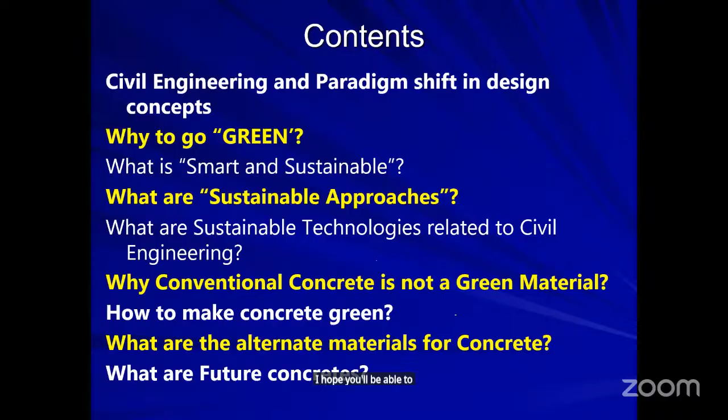Now coming to civil engineering. If you look at civil engineering, it is a branch which has always faced the challenges of the future. This is the oldest engineering branch, one which helped in advancing civilizations and building our quality of life, starting from the construction of pyramids to high-rise structures, or at present, using smart and sustainable technologies.

Throughout this journey, civil engineering has played a major role in building infrastructure. Infrastructure means good buildings to live in, like apartments, high-rise structures, auditoriums, and all kinds of structures. It also means good connectivity through modern transportation systems, whether public transportation like roads and bridges, or water transportation, sanitary and gas transportation systems.

Then there is good connectivity to modern communication systems, be it electric or satellite communication, building of transmission towers, etc., where the knowledge of civil engineering is used. Then in achieving self-reliancy, good irrigation systems, dams, barrages, canals, flood control systems, and storage facilities all involve civil engineering.

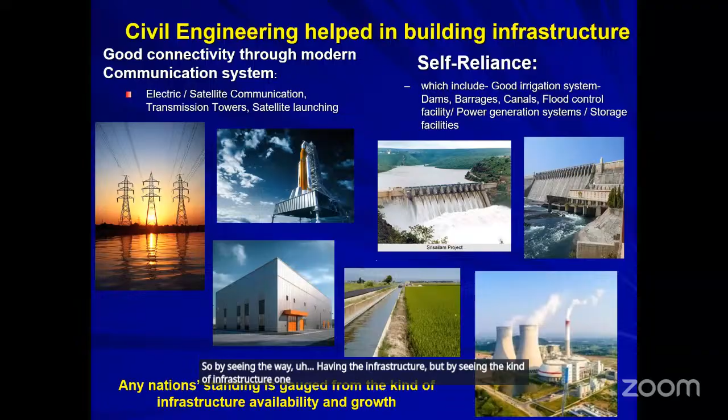Today we are at such a stage that any nation's standing is gauged from the kind of infrastructure availability and growth. By seeing the kind of infrastructure, one can gauge how developed a country is. Civil engineering has also seen great failures, which have led to development of new knowledge and a new kind of engineering called forensic engineering. These failures always remind us of the significance of proper design, execution, and maintenance.

Now coming to the concepts that have changed over time in civil engineering, which made us look for new materials with new properties. I have listed a few of the paradigm shifts, there can be many. The first: we have moved from a stress-based approach to a strain-based approach. The second concept is we have moved from resistance of large forces to evasion of forces.

The third concept is we are moving from a solid mechanics based approach to a fracture mechanics based approach, though we have not yet completely moved. Then from a strength-based approach towards a performance-based approach, and from a prescriptive-based approach to a performance-based approach. These are the paradigm shifts in civil engineering which forced us to look for new materials and technologies.

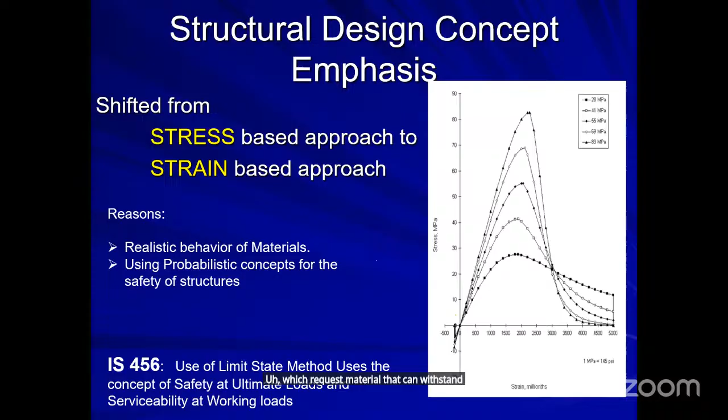Now coming to another paradigm shift: solid mechanics based to fracture based. Solid mechanics, in simple terms, I can say is strength of materials based design. Of course, those are the basic principles, and we still continue to use them.

But normally in strength of materials, what we assume, what we have studied in solid mechanics, is that the material is homogeneous, isotropic, etc. That means homogeneous means no cracks at all inside, no inherent cracks in the material. So based on that, we have not taken the presence of crack into consideration in the design.

But later on, many failures took place. Even though the structures were designed with a great factor of safety, great failures occurred. The reason is the presence of inherent cracks. Any material in this world cannot be said to be completely homogeneous and flawless. Definitely, any material you take will have some kind of inherent flaws, inherent cracks.

Fracture mechanics design bases its design on the concept of the presence of a crack. Whenever there is a crack, there is going to be stress concentration near the crack tip. Not only the stress concentration, but whenever the strains or stresses approach a certain state, the cracks will increase uncontrollably.

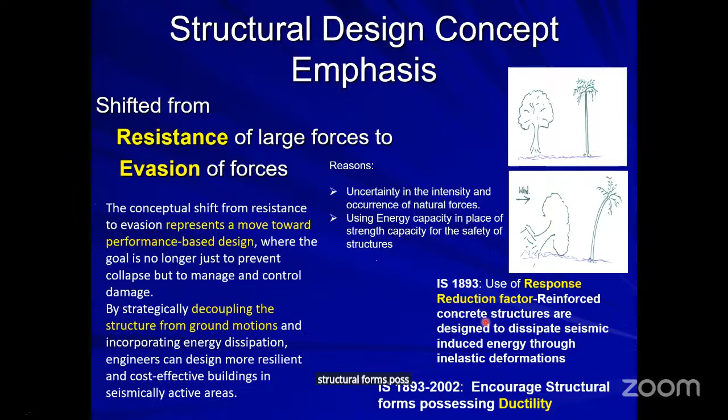Now, another conceptual shift, which all of you know: strength approach to performance approach. What do you mean by strength approach? That means people give more importance to the strength of things only — strength of the material, strength of the structure, etc. But nowadays people are more conscious about performance.

For example, if you look at warehouses, the abrasion resistance of the floor becomes very, very important. So we should design that particular floor to have a certain level of abrasion resistance, not just a certain level of strength.

We have to design the floor for a certain level of resistance, abrasion resistance. For example, in a chemical factory, the floor has to be designed to resist the attack of chemicals, where there is a possibility of spillage. That's why each industry has its own requirement.

Strength is, by default, taken for granted, but the performance people are worried about this. That is why when the strength approach was there, earlier we were using simple normal concrete, which is basically strength based. We used 4 ingredients like cement, sand, coarse aggregate, water, etc.

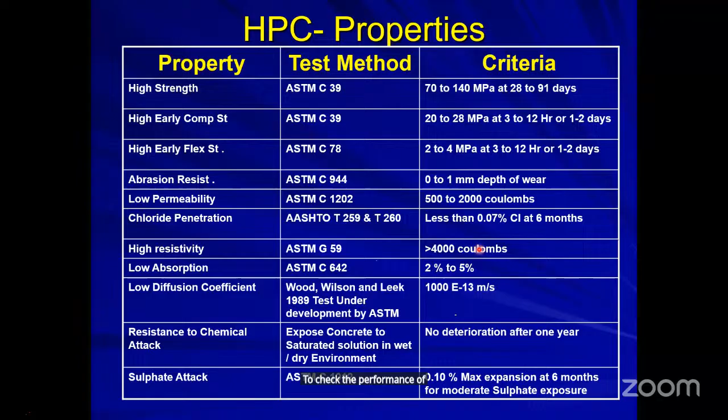So instead of giving a prescription to a contractor, you fix the performance specification. For example, in ASTM, a lot of performance specifications are there. You can specify my floor should have an abrasion resistance of this much, or low permeability of this much. That means, how to test that particular performance character? Based on that, ASTM has given a lot of standards to check the performance of various things.

So what I mean to say is there is an increasing concept of this performance. Then to satisfy this performance, we have to go for new materials or alternate materials, and at the same time they should bring the green concepts and also the sustainability to the picture. These are the paradigm shifts that we have discussed so far.

Now coming to why to go green. Since the Industrial Revolution, the world has witnessed a lot of changes, innumerable technological changes and achievements. There is tremendous population growth, and because of this, there is a tremendous increase in the use of natural resources.

Since 1950, there is almost an 8 to 10 times increase in the use of natural resources. For example, we are using fresh water withdrawals of the order of 16% towards the building activity. Timber, whatever is produced, 25% is being used for building activity. Similarly, raw material consumption is 30%. And ozone depletion due to chlorofluorocarbons in use reaches almost 50%.

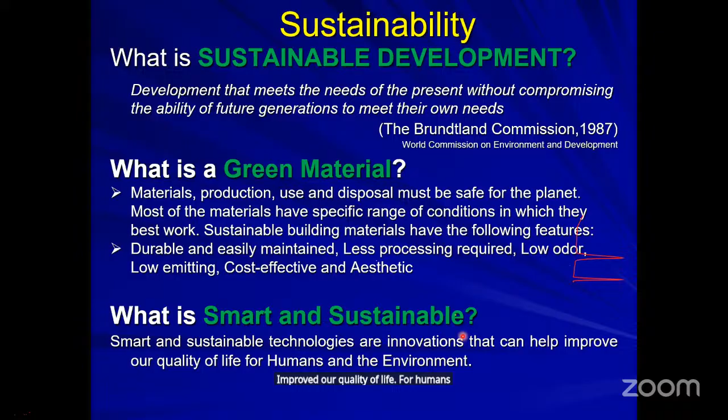Let us see, for example, continuing with smart and sustainability. Nowadays we are recalling smart cities, etc. So what is a smart city? A smart city is one which uses information and communication technologies to improve a city's infrastructure and quality of life. Smart cities can include efficient urban planning, sustainable public transportation, and smart waste management.

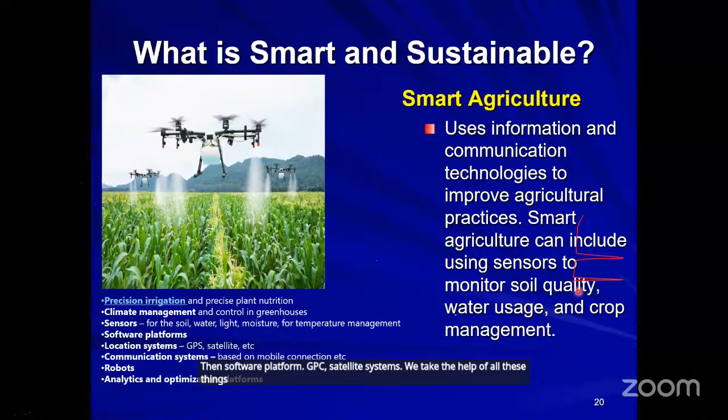For example, smart agriculture uses information and communication technologies to improve agricultural practice. For climate management, we use sensors for soil, water, software platforms, GPS, satellite systems. We take the help of all these things in agricultural practices, so then we can call it smart agriculture.

Then Internet of Things. In this we use smart sensors and devices to monitor the systems in real time. For example, water utilities can use IoT to identify leaks wherever they are and optimize water distribution, etc. So IoT is coming in a big way, making civil engineering a smart and sustainable engineering.

Then of course the buzzword AI and ML. These techniques will definitely be useful wherein large data is there, wherein we can analyze the large data and make useful conclusions, and later on we can use this.

Now coming to the different sustainability approaches. Here I've listed a few of the approaches: one is cradle to gate approach, then cradle to site approach, cradle to construction, cradle to grave, and the last one is cradle to cradle approach. For example, what do you mean by cradle to gate?

Cradle to gate involves, for example, cement production. Cement production starts from the extraction of the ore, extraction of the required raw materials, etc. Then it will be transported to the factory, and there will be manufacturing of that particular cement or material, so that means it is ready to be transported, ready to be distributed. So till that stage, we call the concept cradle to gate approach, where we take all precautions such that wastage is minimal in all these things.

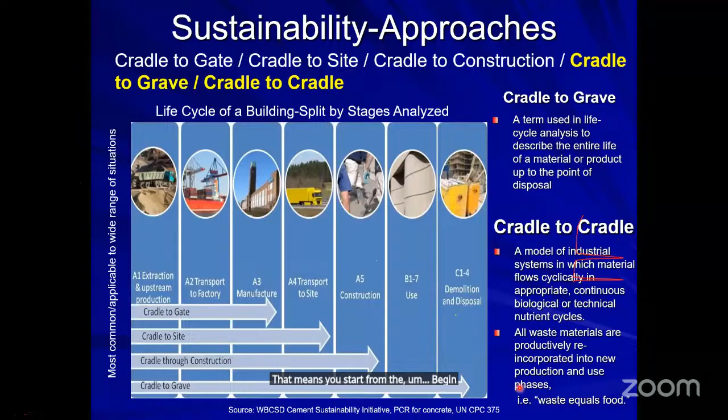That means it starts from the beginning and comes back to the beginning of the cycle. That's why this cradle to cradle approach is now a buzzword. People are trying to implement it in different technologies, different material and structural cycles and performance cycles. Once it completes the material cycle, it goes to the performance cycle. Once it completes the performance cycle, then it has to come back again to the material cycle.

Now coming to the smart technologies related to civil engineering. What are the smart technologies here? Building information modeling, augmented reality, Internet of Things, digital twins. Digital twins is a very useful one, wherein we create a virtual model of the actual systems, and we can experiment on that, how it is going to respond. If it is responding as expected, it is okay. If it is not responding as expected, then we can change our model and take care of the things. So these are all the things which are being helpful.

Then the few ways to achieve smart and sustainable infrastructure: the use of renewable energy to reduce the carbon footprint, use of recycled materials to reduce waste, adaptive design that allows systems and structures to change and adapt to changing conditions, sustainable drainage systems, smart power and water smart grid, smart buildings, green building materials.

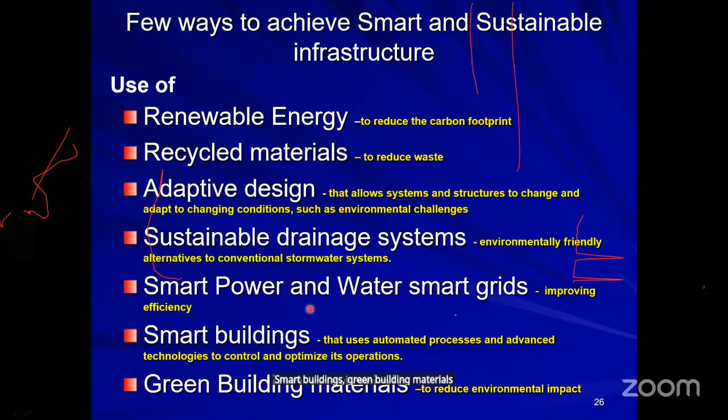Now coming to the building envelope. Building envelope means the kind of material that we use in a building and shape of the building, whatever it may be, how best it is going to conserve the energy. So building envelope also plays a lot of significance in bringing sustainability into the picture.

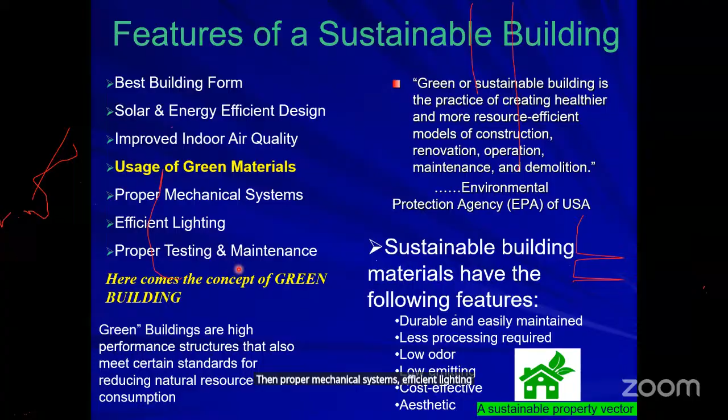Now coming to the features of a sustainable building. Features of sustainable building include many aspects. I've listed a few things: best building form, uses non-conventional energy sources like solar energy for efficient design, improved indoor air quality, usage of green materials, proper mechanical systems, efficient lighting, proper testing, maintenance, etc. These are all the characteristics of a green material.

Then why is conventional concrete not green? You all know that conventional concrete is extensively used. It's the most consumed material in the world after food and water. Apart from the positive aspects, it's extremely versatile, good strength, whatever the required strength we can get from the use of this concrete. Then it can be cast to nearly any desired shape. That is, moldability is the greatest advantage of conventional concrete.

Apart from these positive aspects, there are certain negative aspects. It's the most energy intensive of all manufacturing industries; production of cement involves a large amount of energy. Then limited ultimate strength, limited durability. Another factor is it uses virgin material - sand, coarse aggregate, whatever it may be, natural materials. Using such natural materials means depletion is taking place very aggressively or fast. Then the production of cement itself produces a lot of global warming gases.

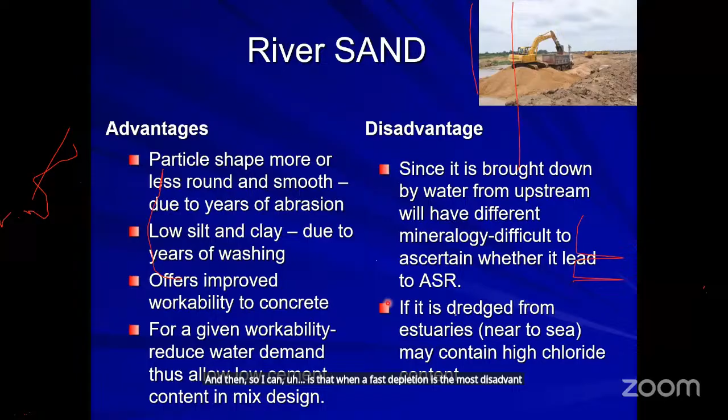But the disadvantage is it is fast depleting. Rather, fast depletion is the most important disadvantage of this particular material. Then what are the alternatives to river sand?

When you are looking for alternatives to river sand, you should keep two issues in mind. What are the two issues that will come up? One is the fine content, another is the harmful substance.

Fine content means there is a possibility that alternate materials may have more fines. More fines means more surface area. More surface area means more water demand. More water demand means reduction in the strength actually. So you have to be very careful about fine content when using an alternative to river sand.

Then another thing is harmful substances. Is there any harmful substance which will affect the durability of the system? These are the two aspects you should look for when using an alternative to river sand.

Then what are the alternatives? There are many alternatives that have been researched, and a lot of information is there in the literature. For example, here I have listed a few: manufactured sand, copper slag, crushed waste glass, fly ash, dune or desert sand, iron slag, foundry sand, recycled sand from demolished construction waste, and surki, that's brick powder, etc. These are certain things attempted as an alternative to river sand.

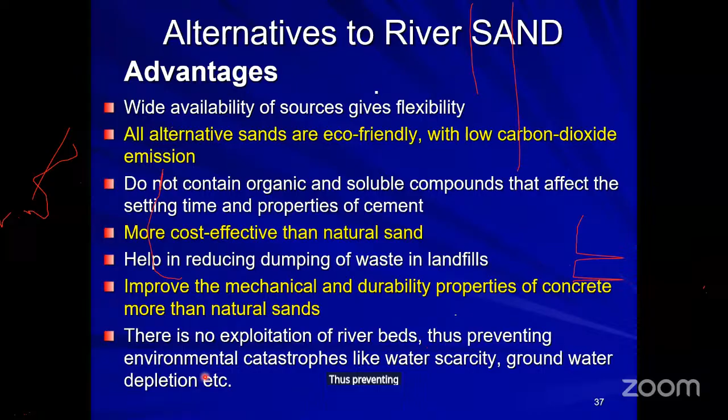Suppose you are using fly ash, it definitely reduces the dumping of waste in landfills. It also improves the mechanical and durability properties of the concrete. Rather than all these things, another important point is there is no exploitation of the riverbeds, thus preventing environmental catastrophes, etc.

As I told you, certain issues we have to take care of: workability issues, because of the larger proportion of fines; low moisture content; and possible adulteration in the manufactured sand or manufactured materials. These are things we have to keep in mind.

For example, if you go for crushed stone dust as a replacement for sand, it's okay from the strength point of view, but because of its sticky nature, it is difficult to work with as a replacement for sand. That is why whenever you are using it for plastering applications, normally a lot of wastage will occur, unless it is properly designed.

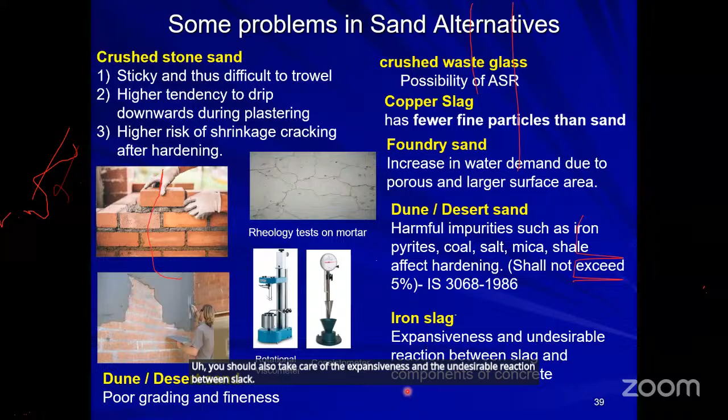If you are using dune or desert sand, there is a possibility of harmful impurities such as iron pyrites, etc. Of course, if you can limit them as per the code of practice, there is no problem. Then iron slag, if you are using that as an alternative to river sand, you should also take care of the expansiveness and undesirable reaction between slag and the components of the concrete. These are all certain aspects you have to take care of when going for alternatives.

Nowadays, sand is being manufactured using the technique of geopolymer. Such a thing is called geopolymer fly ash sand. They are manufacturing it with the proper mix proportion, etc. The material can be manufactured in different sizes, which can be used as a coarse aggregate or as sand. We'll see these geopolymer aspects.

Another aspect is alternatives to aggregates: lightweight aggregates like pumice, scoria, fly ash, expanded clay, chipped shale, expanded slate, expanded slag. These are all things which can be used in place of and as alternatives to aggregates. But at the same time, you should look for the strength aspect. When going for lightweight aggregates, definitely strength is problematic here, so you should be careful in mix design and strength aspect.

Now coming to people using agro waste as aggregates, whether fine aggregate or whatever it may be, in concrete, because we have a lot of solid waste generated from agricultural practices. So how best can we use that in concrete? For example, sugarcane bagasse ash, rice husk ash, jute fiber - these are all available. How best can we put this agricultural waste into proper utilization? From this perspective, I have listed certain aggregates - agro waste.

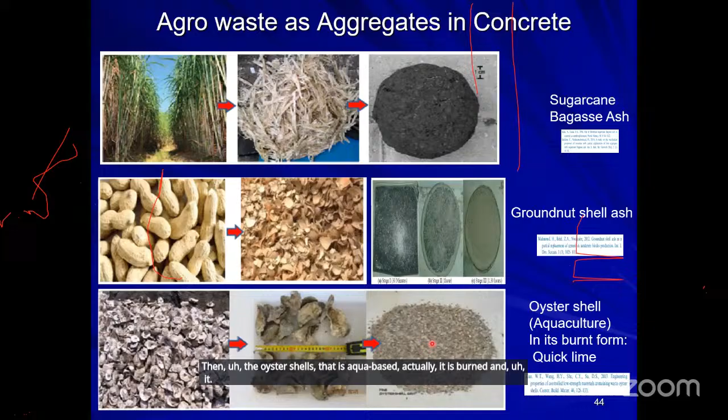For example, if you look at sugarcane after its utilization, we can burn it and sugarcane bagasse ash comes into picture, which can be used as a useful material in concrete. Similarly, groundnut shell - groundnut shell ash can be produced. Then oyster shells, which are aqua based - it is burnt and gives quick lime, which can be used as an alternative to fine aggregate in concrete.

Similarly, cork shell - it's a natural cellulose material, but that can also be used in its fine state as a fine aggregate in concrete. Similarly, giant reed fibers - after burning, the resultant ash can be used as a fine aggregate. Similarly, rice husk ash is being used. Similarly sawdust, then tobacco waste, then crushed coconut shell - coconut shell is also used after breaking it to the required sizes, as an aggregate in concrete generation.

If you look at the physical properties of all these things - sand, sugarcane bagasse, groundnut shell, etc. - almost all have similar specific gravities. We can size them to have a similar fineness modulus. Of course, bulk density wise there is a little variation, but some of this agro waste is comparable with natural sand. Coming to water absorption, this is an issue - sometimes water absorption will be more in case of agro waste, so that has to be taken care of.

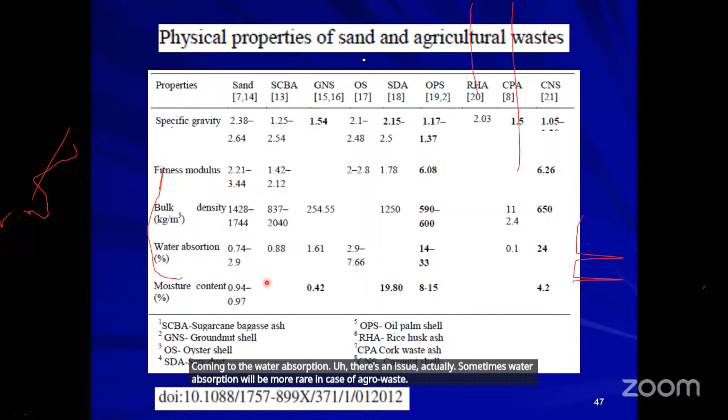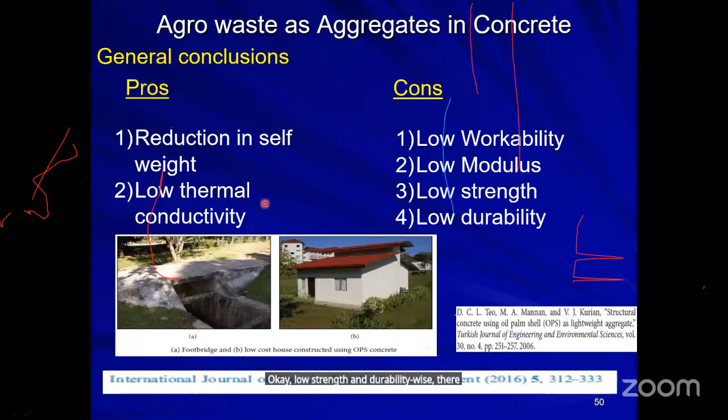Now coming to agro waste pros and cons. Pros: reduction in self weight, low thermal conductivity is one of the advantageous parameters. But when it comes to disadvantages, it may result in low workability, low modulus - meaning there is a possibility of slightly higher deformations - and low strength, with contradicting aspects regarding durability. Of course, all these things I've taken from the literature; you can also go through the literature on how these agro wastes have been used and concluded. For example, slump value of agro waste concrete containing bagasse ash, groundnut shell, oyster shell, giant reed ash, etc., decreased.

The slump value of agro waste concrete decreased as the percentage replacement increased, so this is an aspect you have to keep in mind. Similarly, in case of agro-based concrete containing bagasse ash etc., the minimum strength of concrete was achieved with the addition of around 20% replacement. Such conclusions are available in the literature wherein you can use them.

Now coming to certain special concretes, what do you mean by special concrete? Special concrete is defined as a concrete which meets certain performance and uniformity requirements that cannot always be achieved routinely by using only conventional materials. That's what special concrete is.

Here, special concrete means the requirement. Coming to the requirements, it's requirement based only, so requirements can be anything. Sometimes requirement can be long-term mechanical properties, sometimes volume stability, sometimes compaction without segregation - that means self-compacting concrete like that. So there are different requirements, and each requirement demands a different type of concrete.

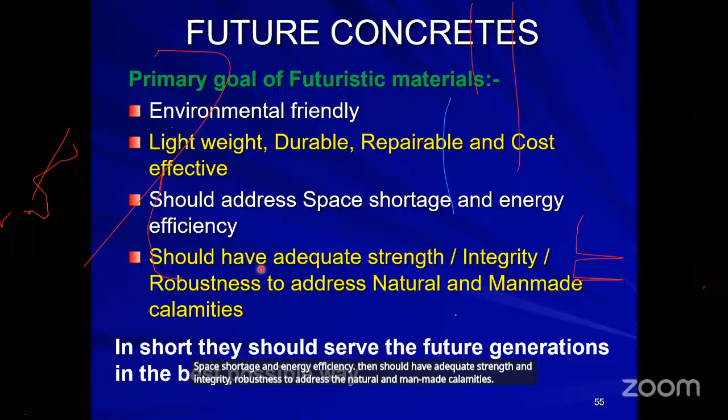Futuristic materials should not only be environmental friendly, lightweight, durable, and repairable, they should also address the space shortage and energy efficiency. They should have adequate strength, integrity, and robustness to address natural and man-made calamities. So these are all the certain requirements of future materials, and what are the possible futuristic materials?

The possible futuristic materials - here I have listed a few things. One is nanotechnology based materials, for high strength and high durability applications we can go for nanotechnology based materials. Then biotechnology based materials - for self-healing applications, people are going for biotechnology, bio-based concretes or bioconcretes etc.

Then super hydrophobic materials for waterproofing applications. Super hydrophobic means - normally the long-term problem with concrete is the seepage of water into the system. So if you can make it hydrophobic, then we can improve its waterproofing characteristics etc. Of course, lunar materials to make colonies on the moon to overcome the space shortage on Earth.

Similarly, another requirement is security protective materials. As I told you, in IS 456 they are introducing three more limit states - limit state of integrity, limit state of robustness, and limit state of restorability. In this concept of integrity and robustness, whenever the materials or structures are exposed to chemical or explosive attacks etc., there should be integrity of the structure - it has to be preserved.

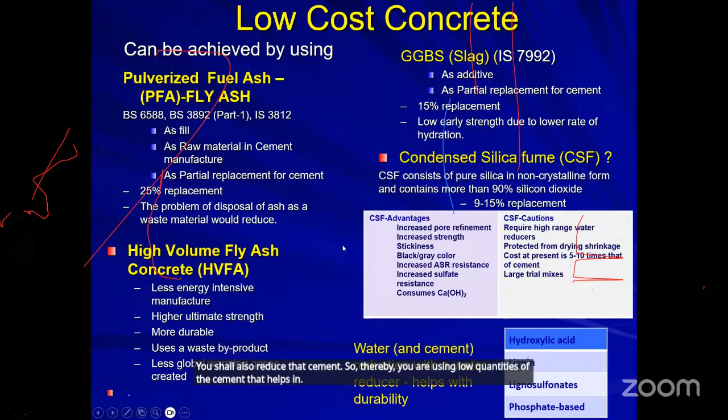Then lightweight concrete. You all know lightweight concrete has got a lot of applications. In this category, I can say there are lightweight aggregate concretes, foamed concrete, and no-fines concrete. Lightweight aggregate means we use aggregates which have certain good thermal properties, so such concrete will have good thermal properties.

There are several routes to produce lightweight concrete. One is no-fines concrete - it is structural, but it's a permeable concrete. Foamed concrete is normally used for non-structural applications only. Similarly, for normal paste with lightweight aggregates, if you produce a lightweight aggregate concrete, that can be used for both structural and non-structural applications. Here, lightweight means its density will be very less compared to normal concrete.

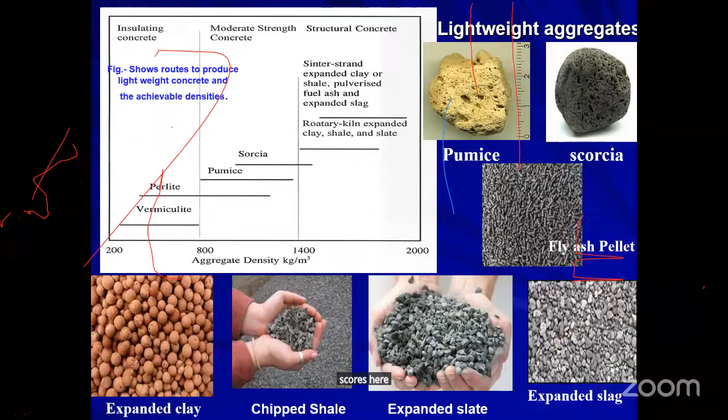Then coming to heavyweight concrete. Of course, heavyweight concrete has limited applications - limited means only special applications. For example, if concrete needs to protect and shield places with greater risk of radiation, then we go for this kind of heavyweight concrete with the use of heavyweight aggregates.

For example, barytes, which have got 3,500 kg per cubic meter, magnetite 3,900, steel shots 5,900, and lead 8,900. So when you are using heavier aggregate, definitely it will have a heavier concrete, heavyweight concrete, which can shield the radiation in a better way.

It can shield radiation, then underwater concreting applications - there are a lot of technologies for underwater concreting. One thing used is condensed silica fume. Then we can also use non-dispersal admixtures. Using these non-dispersal admixtures, concrete preserves its cohesiveness, so that's why it can be placed underwater.

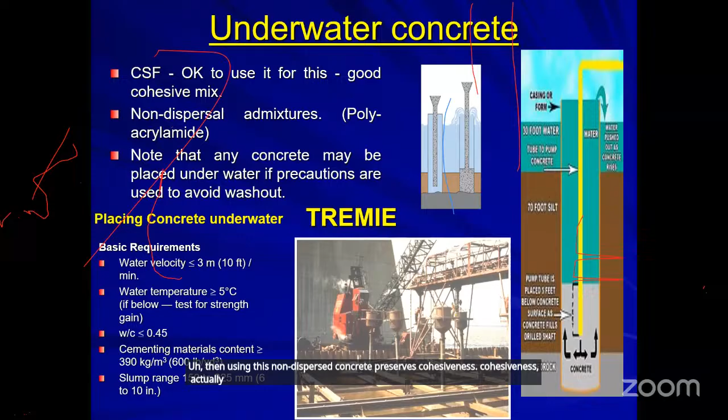Now coming to ultra high strength concrete. Normally the strength here almost approaches more than 120, 150 MPa. In that category, reactive powder concrete assumes a lot of significance. With the use of reactive powder concrete, people have produced concrete up to 200 MPa.

It also has a lot of ductility. With the use of low water-cement ratio, silica fume, fine quartz sand - these are all the ingredients for reactive powder concrete. Then steel fibers, high dosage of superplasticizer, etc. These things are used for producing reactive powder concrete.

They've got superior properties for specialized applications. Almost we can achieve compression strength of 200 MPa and flexural strength of 50 MPa, with modulus of elasticity 45 to 50 GPa, and low capillary porosity. These are all the advantages of RPC compared to normal concrete.

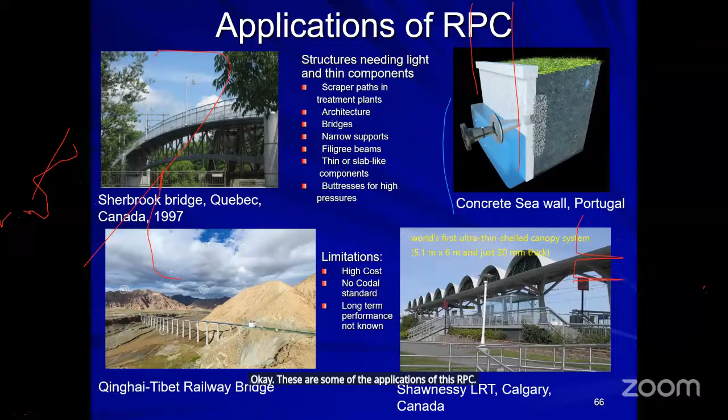Then ultra durable concretes. Here you should understand the concept of durability. Durability means the concrete system will have some durability because of certain inherent nature. Another thing is durability gets affected because of the aggressiveness of the environment - not the concrete itself, but the aggressiveness of the environment damages the system. So there are two ways durability can get affected: one by the internal system, another by the aggressiveness of external things.

So now coming to how we can produce this ultra durable concrete, there are different technologies. One is minimizing the amount of water added. Then using superplasticizers, using wide particle size distribution and packing. Then another technology is enhancing the fragmentation resistance by incorporating fibers. Then use of controlled permeability formwork. These are all the various technologies by which we can produce the ultra durable concrete.

What is this controlled permeability formwork, CPF? This is the one which enhances the concrete surface quality by draining the excess water and air while retaining the cement and fine particles.

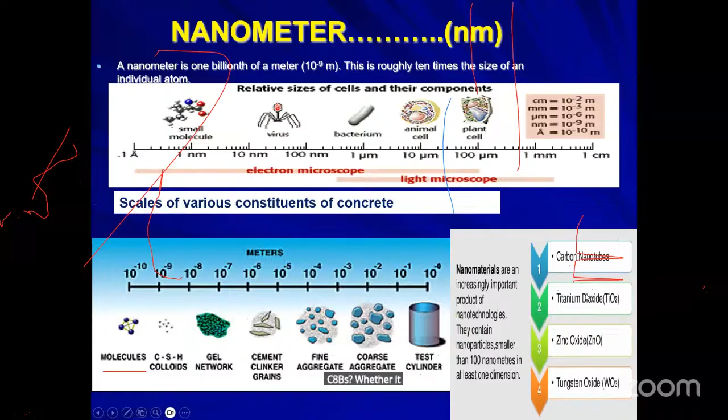So what are the various nanomaterials that we can use in concrete? One is carbon nanotubes, CNTs, whether it is titanium dioxide, zinc oxide, then tungsten oxide, etc. These are all the various nanomaterials that are being successfully used in producing high durability concretes.

Nanosilica is the one which controls the degradation of the fundamental C-S-H, calcium silicate hydrate, which is responsible for both the durability and the strength of the system. When the CSH gel is denser, we can expect more durability. So when you use nanosilica, it blocks water penetration and leads to improvements in durability compared to OPC. As a result, both the compressive strength and the life of the material are increased by 3 to 6 times higher.

Then another technology is the use of carbon nanotubes, CNTs. We can use CNTs to increase compressive strength by about 70%. We can also reduce heat conductivity by about 12 to 30%. Most importantly, CNTs bridge the micro cracks. Once the micro cracks are bridged, crack widening gets delayed, thereby increasing the durability of the system.

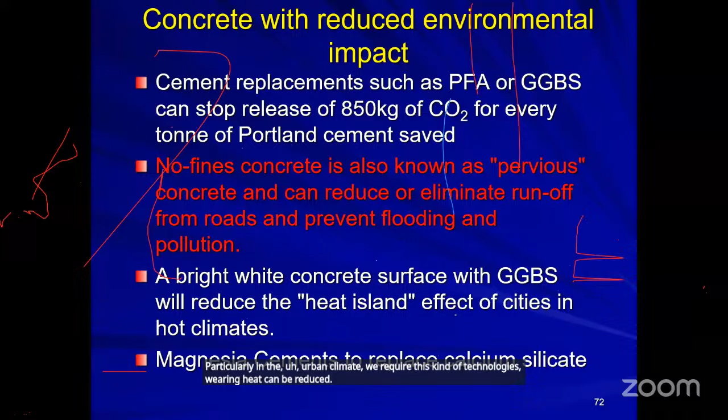Similarly, this slide shows you pervious concrete, wherein rainwater gets absorbed into the ground, thereby reducing runoff of water. At the same time, the ground is also getting recharged with this pervious concrete.

Similarly, fast setting concrete is used for precasting applications.

This can be achieved with the use of superplasticizers, or by going for high temperature curing and autoclaved concrete. Using autoclaving techniques, one can produce fast setting concretes.

Then there's placing of concrete without formwork. This technology is called shotcreting or guniting of structures, wherein we can work with the systems without formwork.

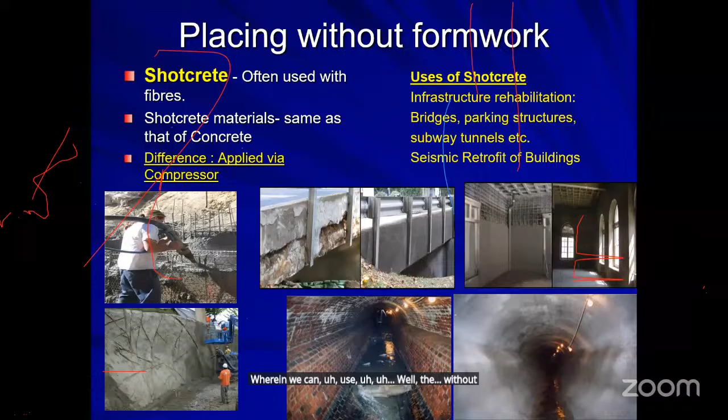Similarly, concrete suitable for bulk fill applications, that is controlled low strength concrete, is used for such applications. Bulk fill applications means, suppose you dig a trench and backfill it with normal soil—it takes a lot of time for setting. Instead, if you go for a CLSC material, we can achieve the stiffness of that system at an early time, at less time.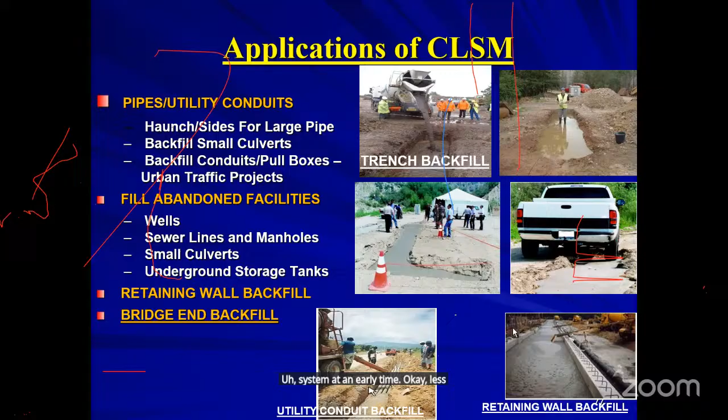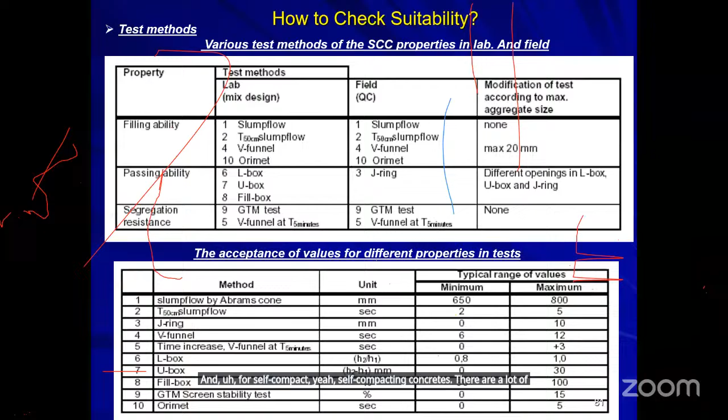For self-compacting concretes, a lot of new tests have also been developed, for example J-ring tests, V-funnel tests. Apart from the slump cone, these are all new tests that have been developed: L-box test, U-box, and J-ring test, etc. These are all the new systems that have been developed.

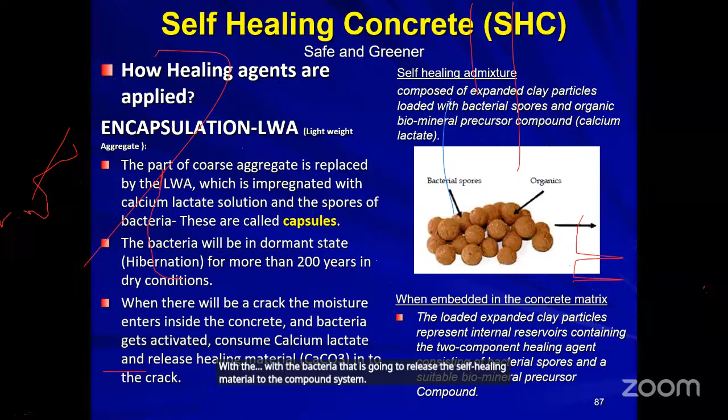Now coming to another type of concrete: self-healing concrete, which we call bioconcrete. In this, a self-healing material is introduced into the system. Whenever a crack forms, it gets closed with bacteria that release the self-healing material into the concrete system. There's a particular type of bacteria, prokaryotic bacteria, that has a large capacity to precipitate minerals.

One advantage of such bacteria is that it precipitates a lot of minerals. Second, it can survive in an environment of large alkalinity, because concrete is basically an alkaline material. So whatever bacteria we use should survive in such an environment, otherwise it will not survive.

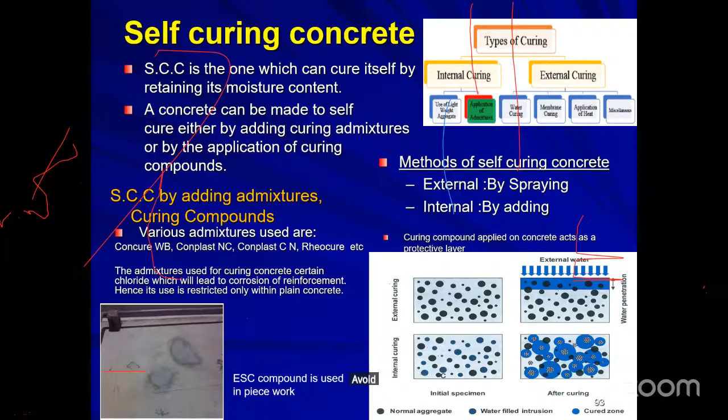Now another thing is self-curing concrete. Self-curing concrete with polyethylene glycol normally helps internally in avoiding water evaporation. Thereby, whatever water is added is useful for the curing of the self-curing concrete.

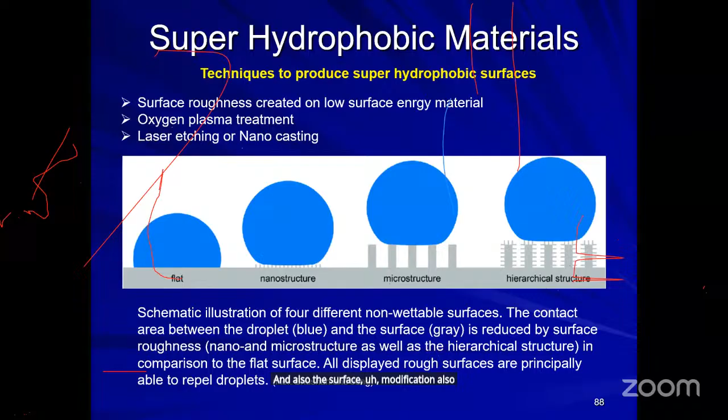Like this, there's super hydrophobic concrete. For this, the materials being suggested as coatings include manganese, polystyrene, nanocomposites, precipitated calcium carbonate, CNT structured coatings, and nanosilica coating. These are certain coatings which impart super hydrophobicity on the surfaces of the concrete. Also, surface modification can increase the hydrophobicity of the concrete.

Sulfur concrete consists of sulfur, fine and coarse aggregate, and contains neither cement nor water. It attains high strength at a very early age, 35 MPa in 8 hours. But the disadvantage is it has a low melting point.

Then there's vulnerability to combustion, poor resistance to freezing and thawing, corrosive effect on steel, and it is very brittle. These are all the disadvantages which people are trying to overcome, to find the best way to address such disadvantages.

So the list of special concretes goes on actually. I'll close it in another one or two minutes. Okay, so these are all the various types of special concretes for specialized applications. Then in future, one may have to use nano-engineered cements.

Then people are working on the DNA of concrete. You can Google it to find what is meant by DNA of concrete. MIT has come out with certain findings wherein one can structure the DNA of concrete so that we can assess the future problems that are going to come in concretes.

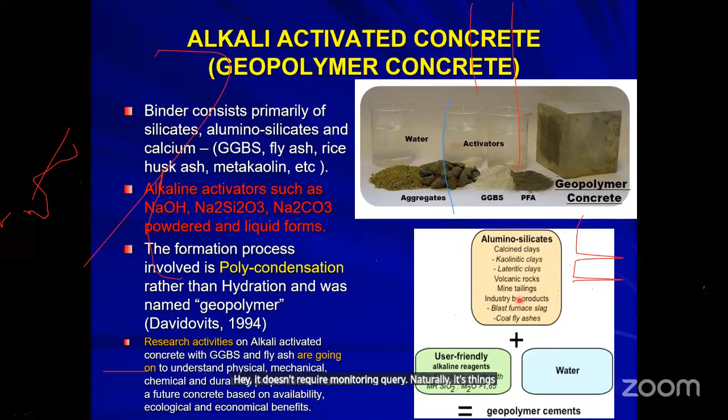Then geopolymer concrete. In geopolymer concrete, people use fly ash and GGBS with alkaline activators. By mixing these things, through the process of polymerization, one can produce the concrete. Such concrete is called geopolymer concrete. It doesn't require any curing or water naturally. That is why it is one of the promising materials for future concrete application.

Then another is carbon concrete. The idea for carbon concrete is from natural seashells. You know the formation of natural seashells - seawater contains a lot of calcium. Now, coming to why not we can use such a process in developing carbon concrete, that is the idea with which this carbon concrete has come into picture.

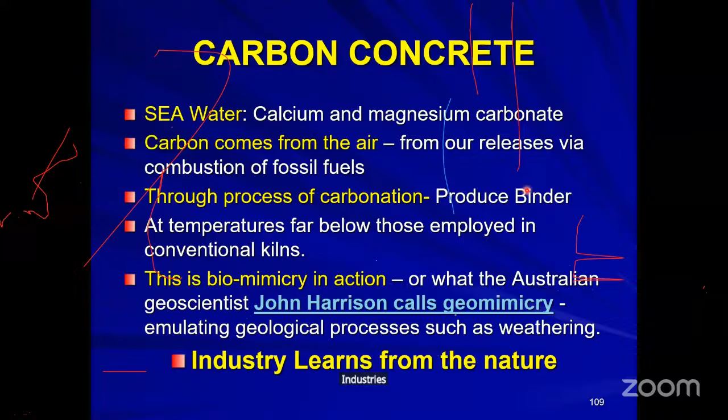That's why industry is learning from nature. Industry is learning from nature, how the natural binders are being prepared. From that, why not use that kind of concept to produce a sustainable and green concrete. Recently, there is one article.

Why not we can generate electricity using thermoelectric cement hydrogel composites. This is one article that has been published in Science China Press in April 2025, wherein by keeping sensors inside the concrete, embedding the sensors, one can produce electricity also. That helps in self-generation of electricity for the building itself.

So like this, a lot of natural technologies are being employed in producing different types of concretes. That means we are learning from nature - that's called biomimicry. Okay, so coming to the end, here I have listed certain research scope activities for the benefit of faculty whoever is listening.

So they can think and work on these things. One is self-compacting concrete mix design, and its fire resistance, shear strength of self-compacting concrete. These are all things which require a lot of research.

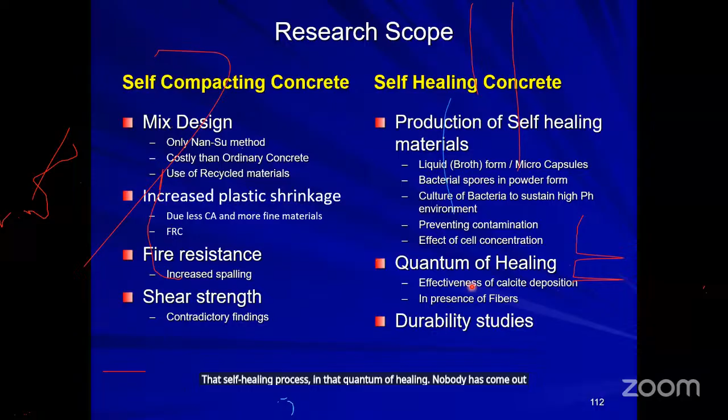Then self-healing concrete - in that, the quantum of healing. Nobody has come out with a quantum of healing actually, so those things we can study. Then a lot of cement alternatives we can see.

Then smart concretes - one can work on self-sensing concrete using CNTs, etc. Then nano-engineered cements, then AI and ML applications in structural engineering. Then bio-inspired concrete, then 3D printed concretes. These are certain aspects one can research.

Now coming to the conclusion. With all these new technologies, we are going to expect some of the special concrete to be a little bit more expensive per cubic meter to buy, but it will require less skill and effort to place, look better, have no appearance defects, be more durable, require more skill at the batching plant, and be more green and sustainable. Knowledge of small things can create gigantic changes with various economic benefits to the construction industry.

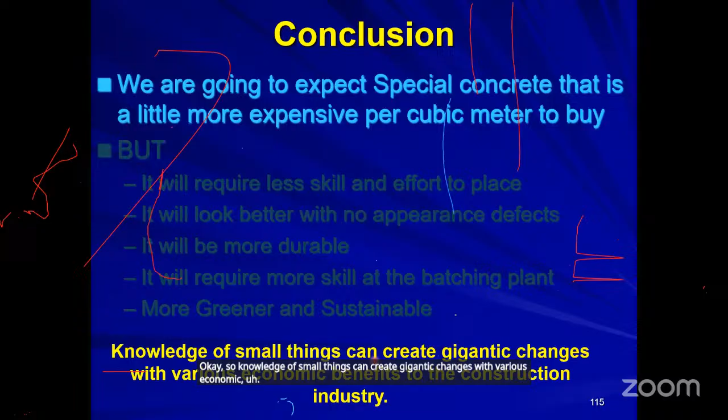So my slogan is: if you care for concrete, concrete is a man-made stone after all - if you care for concrete, concrete will care for you. So know concrete better and care for concrete better. All the best, and this is a small quotation by a great legendary engineer. Thank you.

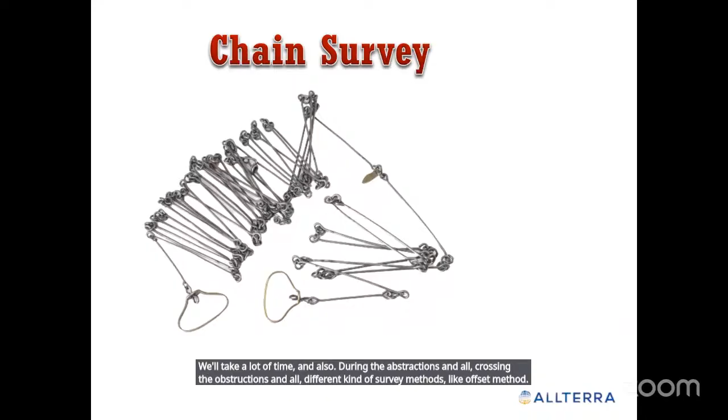Also, if you want to measure a long length of hundreds of kilometers, or at least 5 to 10 kilometers, using a 20 to 30 meter chain, it will take a lot of time. During obstructions, crossing them requires different survey methods like the offset method. Then, after the chain, measuring tapes were introduced.

Measuring tapes, in terms of accuracy and least count, improved accuracy up to 1 centimeter, and in steel tapes of short length, 5 meters and 3 meters, we get a least count up to 1 millimeter. But again, the limitation is similar to the chain, because even a measuring tape has a maximum length of 30 to 50 meters.

After 50 meters, we again have to shift the point and take multiple tape lengths to measure a distance in kilometers. This may cause manual errors, instrumental error, and the final linear measurement will not be as accurate as on the ground.

Coming to the angular measurement system, the cross staff gives an angular reading up to 90 degrees least count, so we can erect a right angle using a cross staff. But any angular measurement between 0 to 90 degrees or 90 to 180 degrees is very difficult, in fact not possible, to measure with a cross staff.

So then, to improve the accuracy of linear measurements, a system came into every surveying instrument, in auto level and theodolites. A method called the Stadia hair method came up in manufacturing systems.

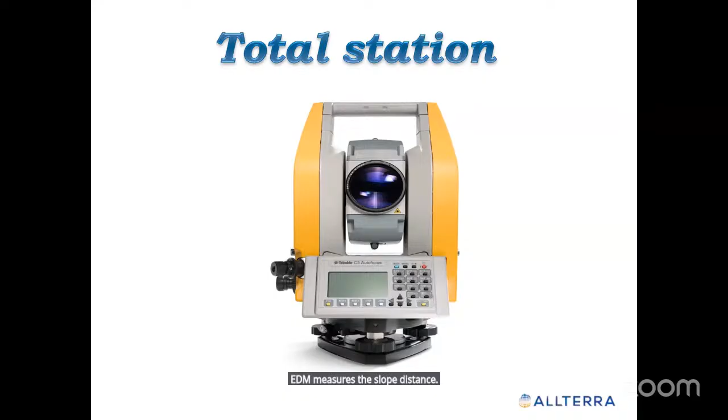The next advanced surveying instrument is the total station, which is a combination of electronic theodolite and EDM. The electronic theodolite measures the horizontal and vertical angle, and the EDM measures the slope distance. Once both are measured, the data is sent to a microprocessor built into the total station.

The microprocessor has standard trigonometrical and coordinate geometry formulas built in. It applies the correction formulas to the readings and always displays the horizontal distance on the screen of the total station.

Not only horizontal distance - in olden days, all measurements were angle and distance based. We used to measure the distance and angle, then plot the drawing using an angular measurement device and a linear measurement device like a scale and protractor. But after total stations were introduced and technology developed, the 2D positioning system changed from an angle-distance system

to Cartesian coordinates, that is, the X and Y coordinate system. From the horizontal angle and horizontal distance, we use the coordinate geometry formula: x1 plus distance cos theta, y1 plus distance sin theta, to derive the coordinates of the next point. That formula is also included in the total station's microprocessor.

In measurement mode, if you select the coordinate system, it will ask you to input the station point coordinate - that means defining where the origin is, and where the x-axis and y-axis are in the graph sheet. Once you define all these points, then you can measure a point with a prism.

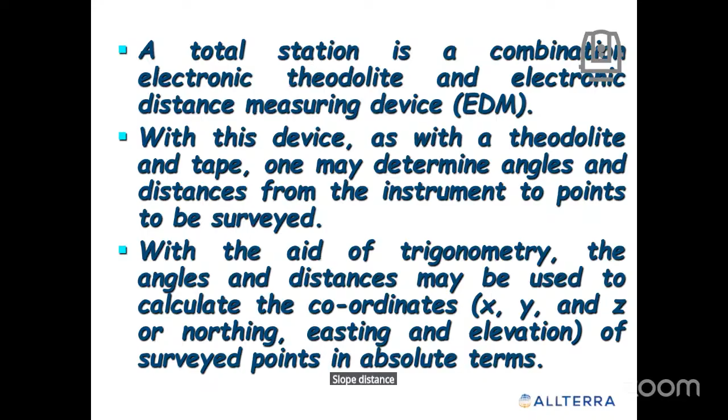Using that slope distance, the same formula calculates the x and y coordinates, and saves them in the memory inside the total station. Since there is no manual interpretation here, all distances and angles are measured by the instrument, and the final results are stored in the system - meaning in the total station.

The manual interpretation is very minimal here, only setting the instrument and giving the right feedback of the existing station point coordinate and the orientation angle. Once this is done properly, everything will be taken care of by the instrument, and the data will be accurate up to millimeter precision, 1 or 2 millimeters. Then the data can be transferred into a drawing software like AutoCAD, 3D, or Auto Plotter, whatever software we are using, to generate a 3D drawing and 2D drawing, as well as to develop a layout.

Once the layout is developed in the CAD drawing, we will take the layout into the instrument. Again, the instrument has a feature called coordinate stakeout. That means first we take the boundary. Once the boundary is measured and given to the consultant and planning department, they will plan the internal roads, buildings, drainage systems, and other things. Each and every point will have x and y coordinates.

For any particular point, there will be an x value and a y coordinate value, or a north coordinate value. If you know these coordinates and input them, once the building construction starts, we have to locate exactly where the building is coming. That is called a stakeout, the location of a point from the drawing onto the ground. That is called a stakeout.

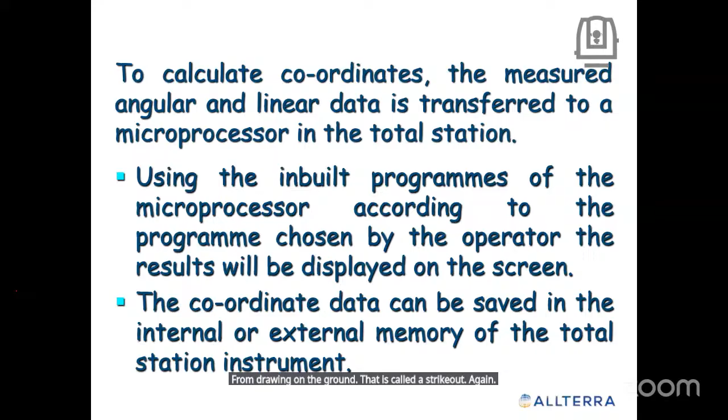Again, in the total station, we feed the coordinate of the required point. If I want to mark this point on the ground, we input this x and y coordinate, which is already fed to the instrument. The instrument will calculate the bearing to this point, depending upon the formula of tan inverse of y2 minus y1 divided by x2 minus x1. Once the angle is derived, the instrument will ask the surveyor to turn the telescope to that particular angle.

Nowadays in advanced total stations, the total station itself turns and locks to that angle. That is called robotic technology. Once the total station angle is fixed, the surveyor will ask the person to hold the prism in that direction. So he holds the prism in this direction.

After measuring, the instrument will indicate the point's position. If he is holding the point at approximately 10 meters by mistake, it will say if it's here, move back a few centimeters; if here, move forward a few centimeters. Once he reaches the point with zero deviation, that is your point.

Using a total station, we can do the survey for building construction, pipelines, any kind of area within visibility, because visibility is required here.

Whereas nowadays in cross-country pipeline surveys, like the project work we are doing, water supply projects from one barrage to the nearest other areas, and also if you see from Yanam to Gujarat, the pipeline was laid - that is all cross-country pipeline. So using a total station for marking those kinds of long cross-country pipelines and construction activities like national highways and state highways.

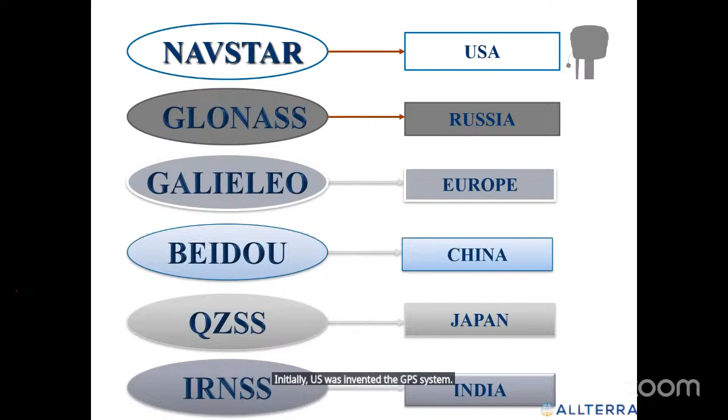Coming to the GPS satellites, initially the US invented the GPS system and named it Navstar. After that, slowly one by one, Russians, Europeans, Chinese, Japanese, and even now India got into that community. The Russian system is called GLONASS, the European system is called Galileo, the Chinese system is called BeiDou, the Japanese system is QZSS, and the Indian system is IRNSS.

The top four, Navstar, GLONASS, Galileo, and BeiDou, are the global satellite systems. That means these satellites from Europeans, USA, and others can be viewed from anywhere in the world. So these satellite systems cover the entire globe.

Whereas QZSS and IRNSS, the Japanese and Indian ones, are called regional satellite systems. Regional satellite system means there are 5 satellites for India. These 5 satellites only focus on India and its subcontinent and surrounding countries. These satellites move across along with the globe, focusing only on the Indian subcontinent and neighboring countries, similar to the Japanese system.

Whereas the other 4 satellite system, the satellites will continuously rotate around the globe, and it covers the total area of Earth, giving coordinates to anyone on Earth from all locations around the Earth.

So how does GPS give the coordinates, and what principle does it work on? It is nothing but trilateration. Suppose you see this in plane table surveying, the 2-point problem, 3-point problem, what do we do?

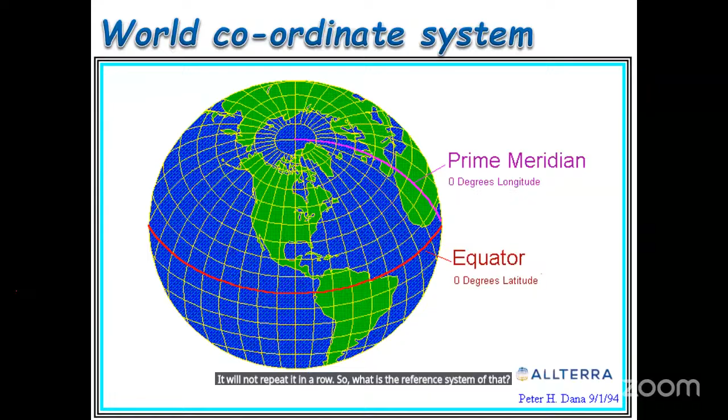So what is the reference system for that? For this purpose, scientists have considered the Earth as an ellipsoid. Actually, Earth is not an exact circle or a perfect ellipse, but it is close. The shape of the Earth is very close to an ellipsoid. So they converted that to a model, a best fit model, designing one ellipsoid with a semi-major axis and semi-minor axis.

The intersection of the semi-major and semi-minor axis is taken as the origin for the GPS coordinate system. That's why the entire globe is like this, so the center point, the common intersection point, is the origin for GPS.

So this is the major concept while designing the GPS system. They have taken a model, and the intersection point of the semi-major and semi-minor axis is taken as the origin for the GPS, and parallel to and perpendicular to the ellipsoid are given as the latitude and longitude. Then what about the height?

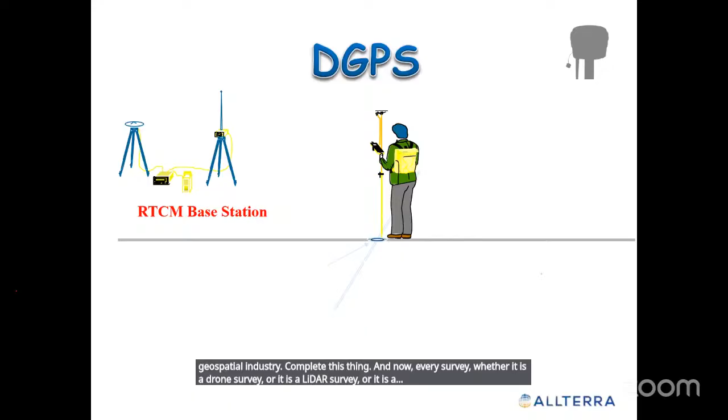This is how GPS technology nowadays has changed the survey and geospatial industry completely. And now every survey, whether it is a drone survey, a LiDAR survey, or a scanning survey, is based on the GPS coordinate system only.

Now coming to this application, coming to building construction and all. In olden days, we used to have only 2D maps, 2D drawings, plans and all. So using the 2D plan, we would fix the column position, then see the locations and all. Even doors and windows were represented in the drawing on paper, on a 2D surface.

But nowadays the system has improved. There is technology called BIM modeling, and there is 3D modeling also being developed. This is a classic example from our Parliament House construction when it was under construction. This is one type of scanner. This model is developed on the empty land - the land was surveyed with a total station or DGPS, but the coordinate system was a global coordinate system. So this scanner is kept at one convenient place and it scans the entire construction progress.

The application of this scanner is that it will collect the data, which goes to post processing, and office software - there are softwares called RealWorks and some others - will check whether the construction activity is progressing according to the 3D model designed by the consultant, or if there is any deviation. I will show you some examples.

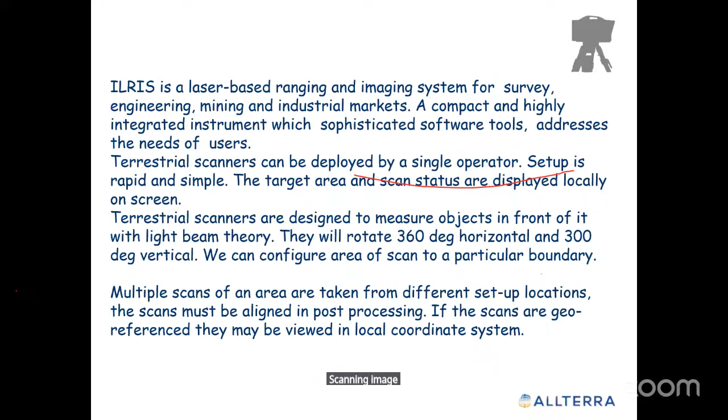Generally, if it is a raft concrete, undulation doesn't affect much. But if it is a flooring concrete, we need to check the levels also, because once the flooring concrete is laid, if it has a certain slope towards some corner, we need to maintain that slope while pouring the concrete itself. Previously, it was done with an auto level, but auto level has its limitation up to 5 millimeters. Whereas using this concrete scanner while pouring the concrete, we can see the heat diagram of the surface.

Immediately the survey crew member or survey engineer will inform the person in charge of the concreting. He will directly go to that location, and while the concrete was still in wet condition, before it set, they will do the rectification to make the concrete surface match the design slopes.

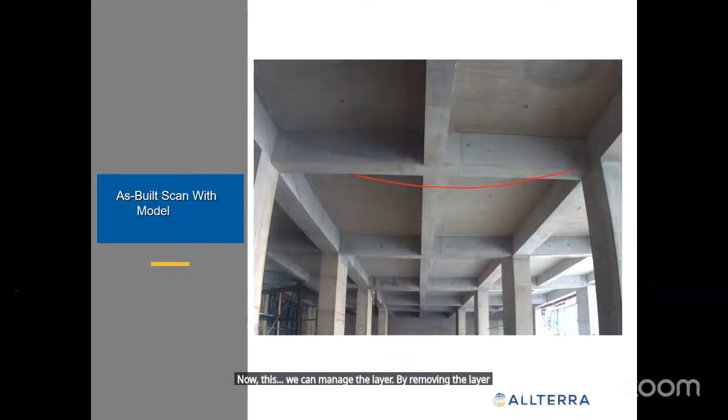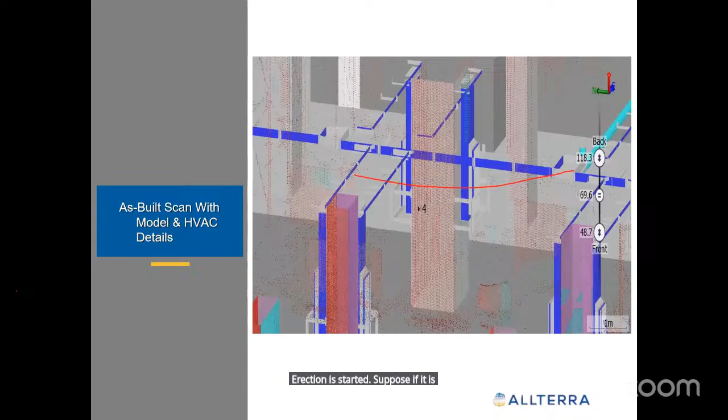And also the main thing is in building construction, MEP - mechanical, electrical and plumbing lines. Generally conflicts come with the electrical, plumbing and mechanical works, because the structural engineer goes as per his plan, but sometimes it clashes with the plumbing lines and electrical lines.

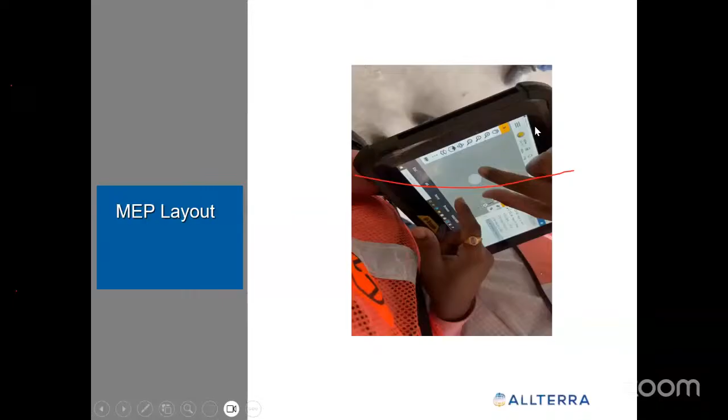So to eliminate that, while doing the structural engineering, once the columns were laid, we can easily check these points - whether some point is coming here, we don't know exactly what it is, but there is some important object coming here. Using this instrument, it will point that out - see, exactly it is pointing towards the corner, like this, exactly pointing to the location, pointing to the corner.

Now see, this C5 is the bolt center point. Actually, it is supposed to come here, but the position is shifted. Why? Because either in the model, somebody has made a mistake, and instead of placing it here, they might have given the position here. So this has to be rectified.

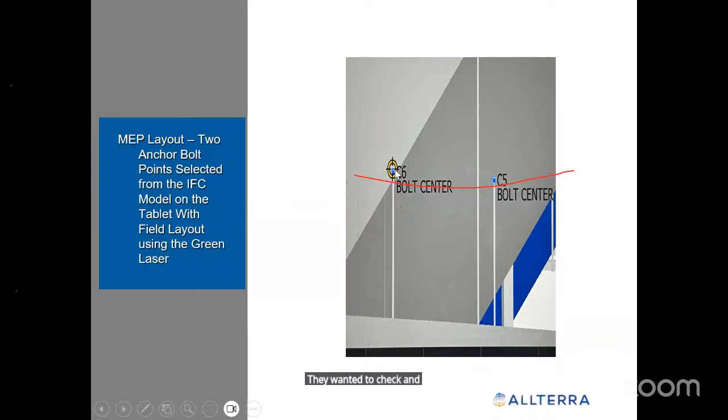That's why before the plumbing line or electrical line layout work gets started, these people will go, take that BIM model, switch off all the layers, and switch on only the layer required to check, and they will check the points from the drawing directly in the field.

There is no need to convert those drawings into X, Y, Z coordinates. From the model itself, we directly get the coordinates, and if we click some point and check where it is instead of showing it here, it was shown here. So immediately it will be communicated to the design team and planning team. They will rectify and modify it, and send the revised drawing and 3D model, which will then be used for layout of the building components.

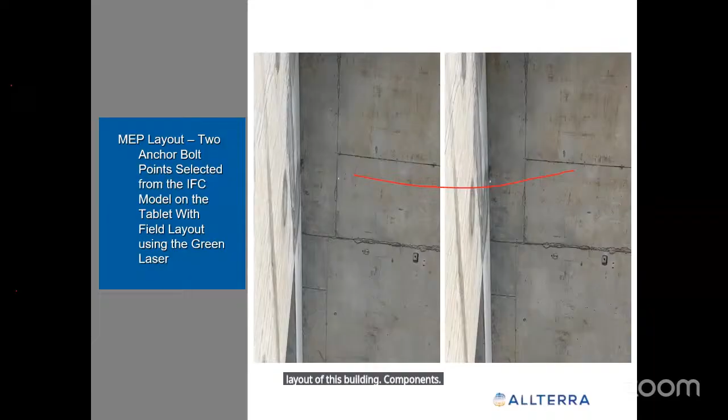So here also there are some components they are checking here, here and here. It is perfectly matching. It is coming to the location, but here it is going to the edge, because these are all the conflicts they detected before the work was started.

Coming to the mining industry, this scanning data gives a lot of advantage particularly because in olden days they used to calculate volumes by theodolite using the tacheometry method, but they were not able to cover everything. Even after the total station came, they used the total station, but they were not able to measure each and every point on the surface of the mining pit.

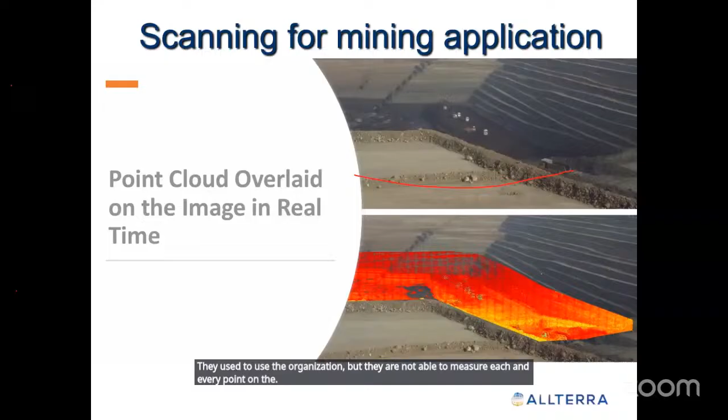Once the scanner came - such an instrument takes minimum 26,000 points per second up to 1 lakh points, depending upon the scanner specification - each and every point on the surface of the mine pit will be measured, and exact volume up to 0.02% variation is now achievable. The volumetric analysis and the billing system improved a lot to get the actual quantity of measurement in large open cast minings.

Now you see here the scan data - it covers each and every part with the scanner. Whereas if you are using a total station, one person has to go with the prism, hold the prism there, then move to the next point. If that point is accessible and safe, he will go there; otherwise, he will miss that point.

Whereas with the scanner, by standing at around half a kilometer or 1 kilometer, that entire mine surface can be scanned and digitalized into a 3D model. This is the actual 3D pit - if you see with a scanner, it is the actual 3D mine. It was scanned from 4 locations, and a complete 3D map of this mining pit was made, enabling them to get the exact quantity of volume excavated from this mine as on date.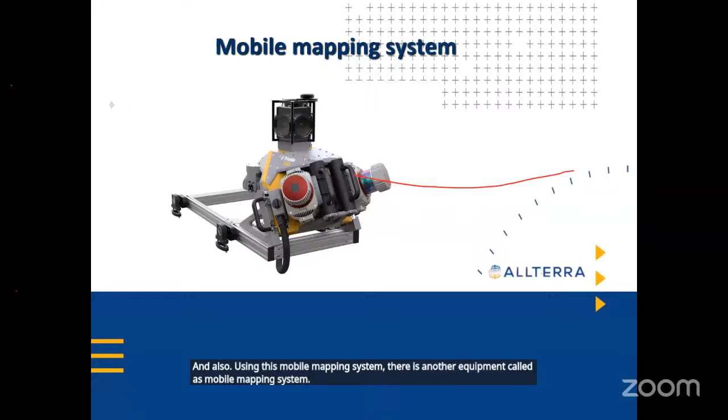Also, using this mobile mapping system - there is another equipment called the mobile mapping system - this kind of survey is done along the road, along an existing railway track, or an existing road. The government NHAI is planning to expand it and make it a 4-lane road. By that time, if you are doing a total station survey, getting the actual entire site condition in a 3D map is not possible with total station.

Now you see on the left side diagram, with this black and white point cloud data, we are able to see what is the hill and how much quantity we have to cut. Similarly, if it is going through a built-up area like a village or small town, how many buildings are there, what is the dimension, height, length, and width of the building up to some extent - complete breadth and height of the building, the scanner will capture with a 3D map. This scanner is also called a mobile mapping system - a mapping device mounted on a moving vehicle.

It consists of a LiDAR, like a scanner, like what we are discussing, static scanner, to capture the point clouds from a mounted arrangement on a moving vehicle, and a GPS system, GNSS system, to measure the position of every moment when the car is moving at 40 or 30 kilometers speed. For every second, it will calculate the position.

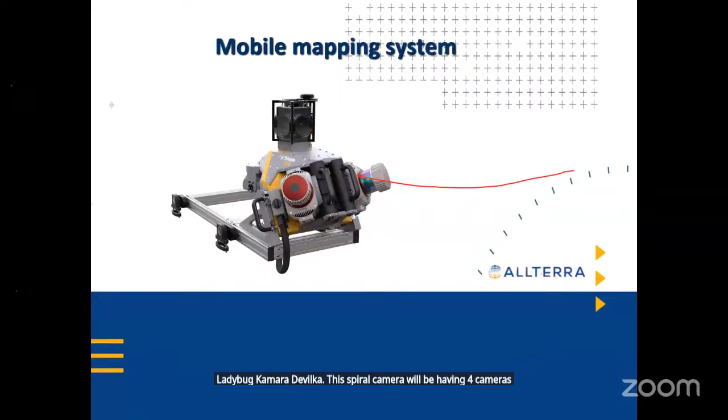This mobile mapping system also has a camera on top of it. This is a spiral camera, a ladybug camera they call it. This spiral camera has 4 cameras on all 4 sides. These spiral cameras take photographs of the surface as we go along with the vehicle, and a 3D photograph along with point cloud data will be created.

The planning team and design team take this data and analyze it in the office itself instead of coming to the site. Whenever they have doubts, they will come to the site, evaluate the data, and do accurate estimates of the project with this accurate data.

Nowadays, for railways also, for high-speed rail and such, Indian Railways is doing this kind of survey on the existing tracks to know what objects are along the track on either side. If a train moves at 100 or 200 kilometers speed, what will be the impact of that speed on the neighboring habitation? These kinds of instruments are available for that.

This is the instrument, mounted like a roof rack, with a scanner, a GNSS system, and a distance measurement unit also. Inside the vehicle, there's a battery for power supply, a control unit, and a data power unit for the LAN connection to get the signals inside. This is a mobile mapping system, widely used for highways and railway applications.

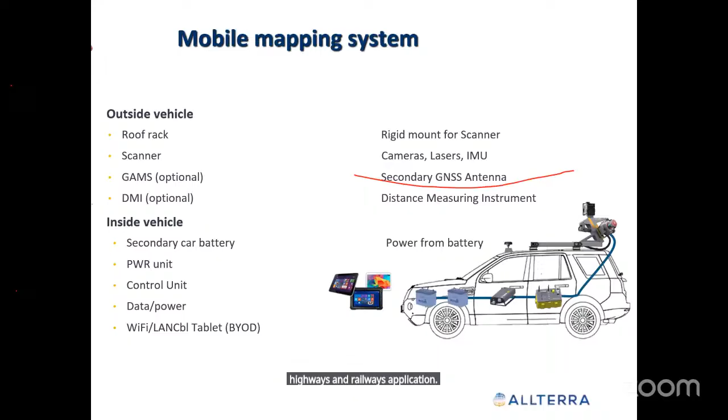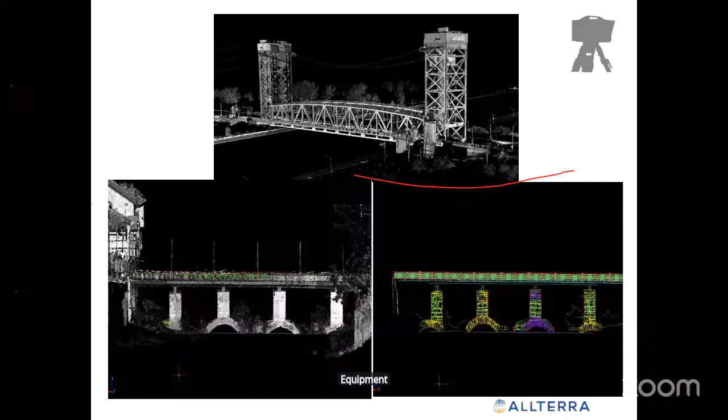This is the building scanning data. A bridge was scanned by this equipment, and a 3D diagram was created for further analysis. This is the point cloud, how it looks. This is also point cloud because it's a 3D diagram - we can rotate it in any direction to visualize and generate views.

Nowadays, post-processing software is coming up with advanced technologies. If I don't want to see the trees, I can select those components and say remove it - it will filter all the trees and give me only the road surface. If I want to see only the electrical poles, I can filter for only electrical poles by giving some commands, and it will remove all other components and give me only the electrical poles. Road crossings, road signs, and all these things can be viewed, filtered, and updated in the software.

So this is also the same data from the mobile mapping system. Even in tunnels, sometimes these scanners are nowadays being used as well.

Nowadays these methods are widely used. Before, tunnel excavation was done by manual methods, just measuring the angle with a theodolite to fix positions, and the blasting team would go and do the blasting.

Now with scanning, they create a template of the tunnel. The template is loaded into the instrument. Once the measurement and scanning are done, the software in the instrument compares the template with the actual surface to determine how much is overcut and how much is undercut. For the next blasting, the engineering team plans accordingly and uses the proper quantity of blasting material to get the best blasting surface, so that the concrete lining can be minimized.

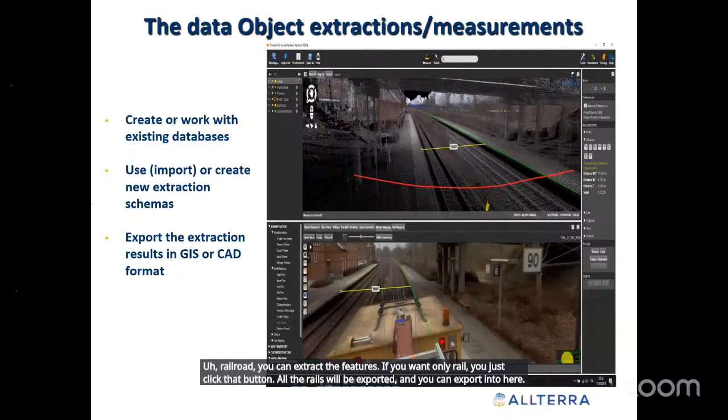So what is the clear head clearance of this particular bridge from the rail? If something new is coming up, like a new kind of engine, you need to know the clearance here. From this drawing itself, without going to the site, we can easily measure the distance and height between the current surface and the bottom of the bridge.

These are all lines drawn automatically using the algorithm in the software. We can automatically join the lines, and those lines can be exported into DXF format so that further designs and drawings can be done in DXF.

That is a mobile mapping system, and this is the handheld scanner. Nowadays, for congested areas in any town or village like Bombay, Dharavi and all, going inside with a mobile mapping system and taking readings is very, very difficult. Also, with a static scanner, it has to be shifted a number of times. So for that kind of purpose, they use this backpack system called SLAM technology.

This handheld GPS scanner is also a scanner - there will be a GPS inside it, and on top there will be an antenna. By keeping the scanner on the back, one person will be moving around the roads, and whatever surface is visible to the scanner, all the 3D point cloud data will be recorded, and further analysis like the mobile mapping system can be done in the office.

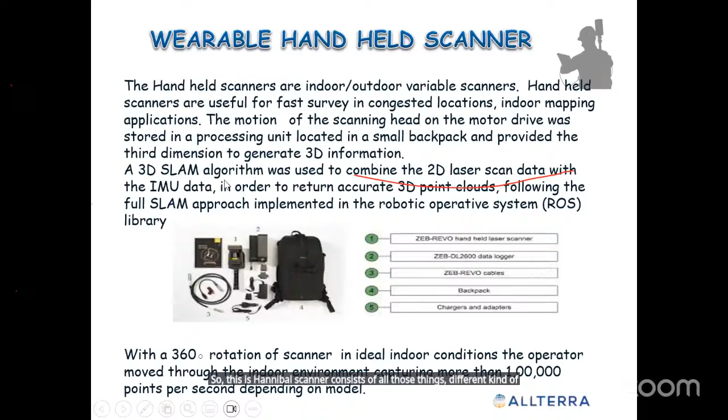So this handheld scanner consists of all these things with different kinds of components. It is also having one GPS. Calibration is necessary at every workspace and all.

Also, we can go up and collect data from the first floor, second floor, third floor as per the construction site, and shock and dust proofing can even be done. Tunneling - inside the tunnel also we can do the scanning here. It is also available with a 360 degree panoramic camera, colored point clouds. So the camera will take photographs, and point clouds will be overlapped on the camera images, panoramic images. We'll get a clear cut 3D color image with point cloud data. It can be used for volumetric analysis also. Street surveys up to some small streets can be done with it.

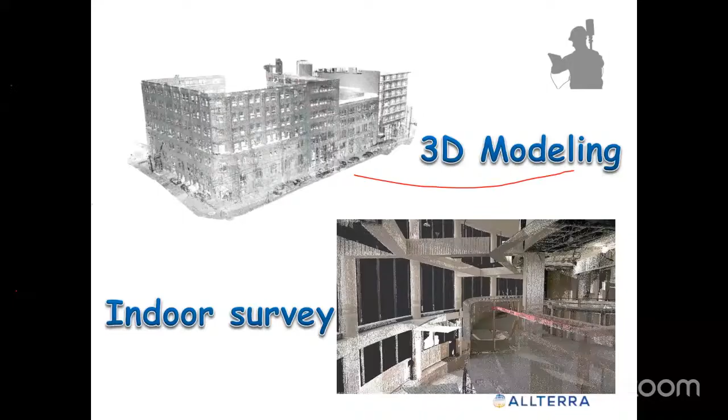Now coming to the unmanned aerial system - surveying grade drones. The importance of drones has nowadays become very popular for survey grade work. Why? Suppose for any land parcel mapping, if we are doing a resurvey project in Andhra Pradesh, and we want to show a farmer who doesn't know about GPS, drones, LiDAR and all, we go with GPS, taking measurements at the corners, and drawing a polyline. So we show the farmer: this is the polyline, this is your land boundary, and this is the extent.

Suppose it is as per his knowledge, because from his old books or from his parents, he knows it is 1 acre or 2 acres.

If it is within that limit, he will be quiet. Sometimes because of the record problem, there will be some error, and if it is less, definitely some doubt will come into his mind. But if you do a survey with a drone, you will have an orthomosaic image like a Google map on your hand with an accuracy of 5 to 10 centimeters. If you show by drawing a line in front of the farmer, this is your boundary, this is the extent, he is able to understand what it is actually. So this is the main importance of that.

Now, Government of India initiated some projects like SVAMITVA and Naksha through Survey of India. The purpose of SVAMITVA is for each and every village boundary, that's called Abadi. Drone will fly, they will take the image, and the local taxation of the panchayat will be done based on the 3D images from the drone. Because in manual systems, if your plinth area is so much, somebody will come and measure manually and write it, whereas in this case it is documentary proof. Whatever is the plinth area from the drone imagery, we will measure and say this is your tax. So the taxation will be very fair and genuine.

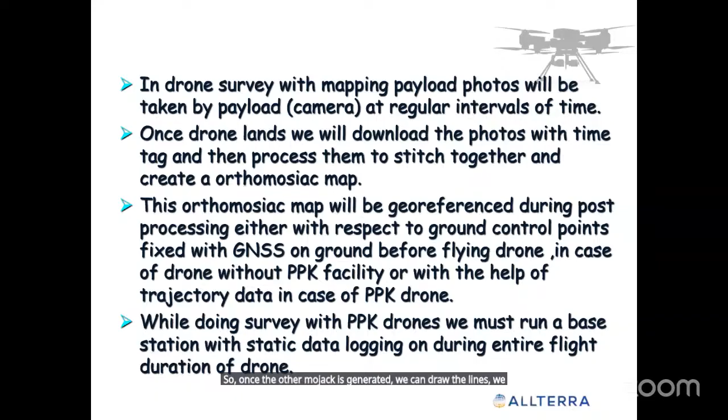Once the orthomosaic is generated, we can draw lines, measure the distance between points, and measure the height between two points. All those can be done, and it can be exported into third-party software or AutoCAD for further analysis.

Benefits of drone surveying: it reduces field time and survey cost, because once you fly the drone, your entire location map will be there with you again and again. If you require some data, no need of going to the site. You can just keep opening this drone orthomosaic data and we can do that.

Then it provides accurate and exhaustive data. Exhaustive data means huge data - if you can fly the drone to the entire Vizag city with different kinds of drones. Some drones fly up to 90 minutes, some up to 20 minutes, and recent developments even fly for 2 hours. For one hour of flight they cover around 5 to 6 square kilometers. Like that, huge areas, some 100 square kilometers also, we can have drone data readily available with us.

Also, some inaccessible areas - suppose there's an area that is water ponds, we cannot go into it. Otherwise it's filled with water and grass and we cannot step inside. But we want the boundary of that particular location. We're not interested inside, but we want the boundaries, and we cannot reach the other side. So in that case, if you fly a drone on top and get the images, we can easily get the area and other features available inside that harsh location.

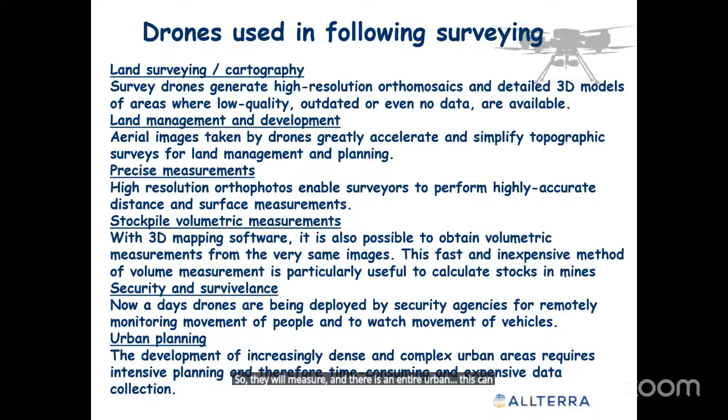Urban planning - now we are talking about the Naksha project. They will fix the control point with GPS, then fly the drone. They will get a 3D image of the entire building, every building. So they can measure, and entire urban planning can be managed using the drone image data. This is other project data.

For ortho maps and 3D elevations, if I wanted to do some 3D elevation - what is the height here and what is the height here? If there is any pipeline or elevated reservoir to be constructed, what is the best location as per the elevation height - we can easily plan.

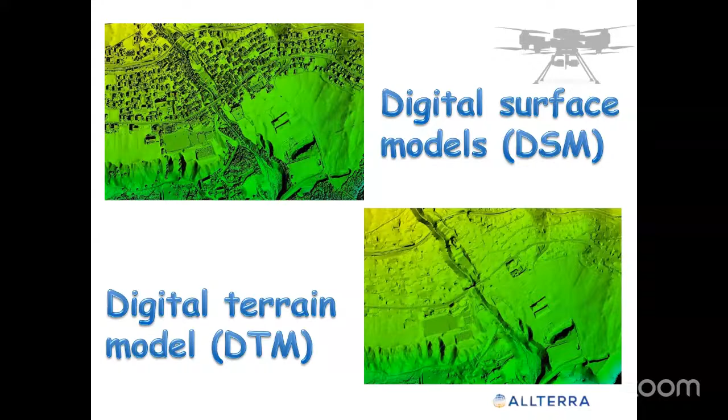We can easily make a digital surface model, DSM, and digital terrain model, DTM. From the same data, we can create all these kinds of surfaces for analysis of volumetric or contour generation, or for drainage system development, whatever it is as per our project requirement.

This is the brief about the survey techniques, evolved right from the chain and tape to the drone technology as of now. Every vertical has its own huge application. If I talk about tunnels, it is big. Even monitoring high-rise buildings is a separate subject with separate software - same equipment, same deployment like total station, robotic total station. Even for bridges and high-rise structures, there will be some swing with the wind, and that swing is monitored every day. Also for dams, when completely full and gates are open, what is the deflection of the dam - there are equipments which monitor those deflections, and that directly gets transmitted to a computer, and from there to the headquarters. So different kinds of technologies are there, but this is a brief about all these technologies.

Thank you, sir, your session is very informative and very interesting, sir. We are very grateful for your time and effort, sir. Thank you, madam. Thank you all for your patience in having this interactive session. If you have any doubts, you can reach me on my mobile, and you can also get my mail ID from madam. Yes, ma'am, thank you very much. Have a nice time, I'm leaving. Thank you, sir.